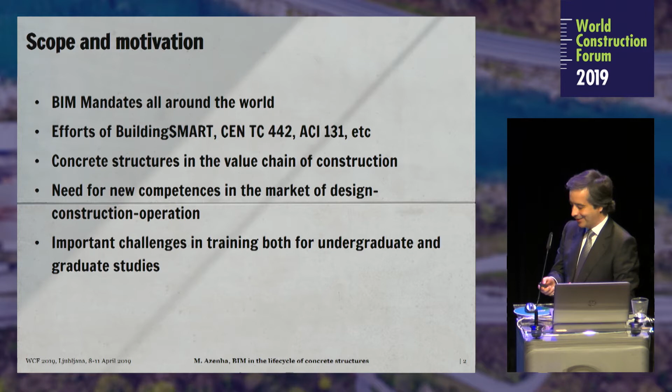So I am focusing here a little bit on things you can do with programming towards extending the capabilities of tools towards what we really need as engineers. And there I am drawing a lot of my inspiration from what I felt when I worked as a full-time structural engineer. So let me shut up and continue.

So I have the presentation divided in two parts. As the challenge was to discuss the life cycle, part number one is actually how to blend BIM into the life cycle. And I'm bringing here four hopefully inspiring examples, two of them at design stage, one mostly focused on the construction stage, and the other, which is the bridge, focused on the maintenance area.

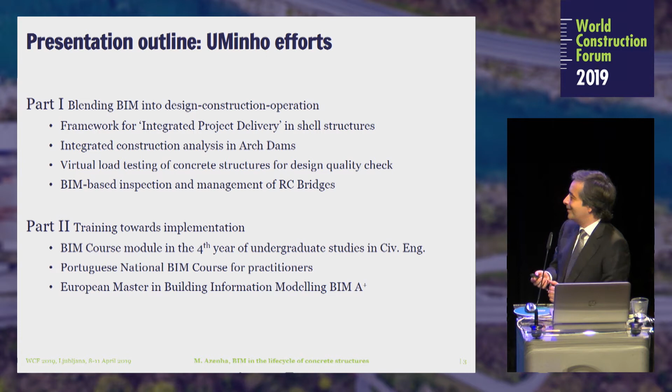Then in a second part, I think it's important to provide a testimonial of the initiatives we have been undertaking, despite the fact that BIM is not mandatory at all in our country, but we are managing to provide sort of an education to our students and to our practitioners towards making this more of a reality. And finally, the last ingredient, which is something we are very proud of, the European Master in BIM. So let's go in parts.

Part one. So I want to speak about these four aspects, starting with one related to the design of thin concrete shells. Thin concrete shells are known to be a terrain that architectural engineers or engineering architects really fancy, because you need to have the two capabilities to design such a thing. And they are normally limited to people that have a very great sensitivity on the structural and architectural side.

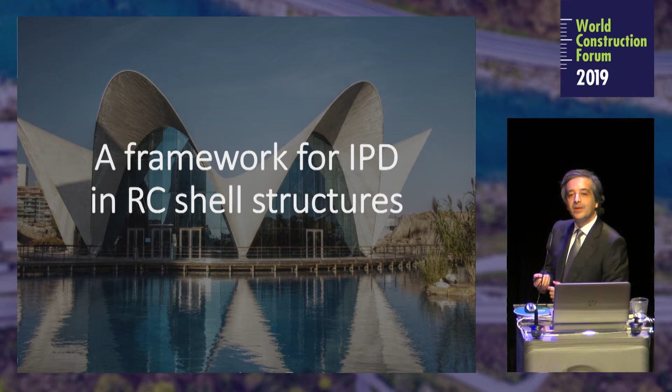And what we wanted to do with this thing that I show you here, a framework for integrated project delivery in RC shell structures, was to bring about the possibility of a real-time interaction between a civil engineer, for instance, and an architect working on the development of a thin shell. So what we created was a framework based on standard software.

I will try not to speak about the software itself, that's not the point, but using standard software that is feasible for this, we have this left-hand side screen, which is the environment where we are actually modeling the shell, the concrete shell, based on an architect's principle of the supports that should be given and the principles of what is the program that needs to be filled from an architectural point of view.

And then, based on such supports, we activate the dynamic relaxation methods. This is the hanging cloth principle, nothing new here at all. And then what we made was a framework that will allow the interaction directly under our total control of the parameters and the way of modeling that we see in a structural analysis software. And this allows us to have real-time information.

As soon as we pick up a shape according to the architect's intent, the structural engineer is providing instantaneous information, or even the architect can get it, under controlled modeling options. This is very important to give sensitivity to the structural engineer. So we provide information about stresses and deformations and hence the viability of the solution. This was made with these software attempts, and in the end, of course, we end up with a BIM software and a BIM platform, which will yield the final solution.

So with these quick fits, we change shape and quickly get the feasibility, and then we also add the possibility of bringing, for example, a stiffener, which will make it viable to have other things. As an additional taste, one thing that we did was to add multi-criteria optimization processes, again with the standard methods of genetic algorithms, but we include several aspects which I will not go into detail, but you see here cost, solar lighting, structural performance. We also add a little bit of sustainability, but only from the demonstration point of view.

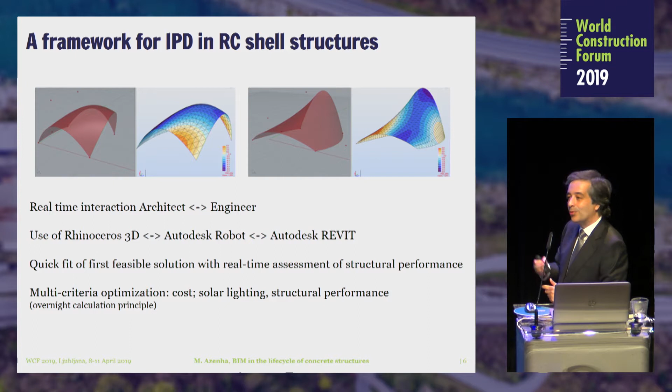We were not really deep in that, but then we followed what we consider a very important aspect, the overnight calculation principle. So after reaching a solution between architect and engineer, we let the computer work overnight on alternative or improved solutions so that we reach something more interesting. So we're speaking about BIM. There needs to be a process map, but I will not bore you with information about the process map. But basically, having an architecture and engineering discipline, we are putting the burden more on the side of engineering because we were playing such a role.

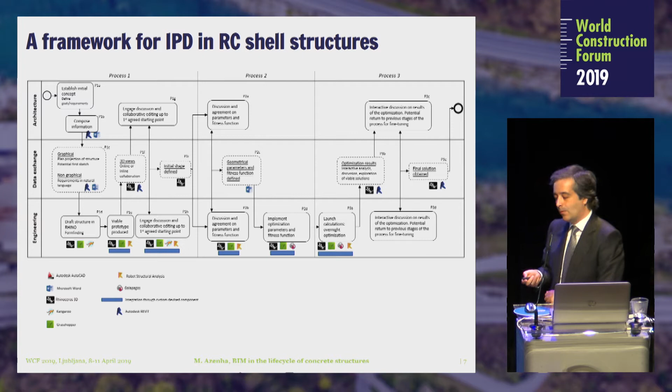Anyway, this takes 3 processes, as you see above, and the first 2 processes are the ones that pertain to the real-time interaction between architect and engineer, and finally we parameterize the structure and put it through an overnight calculation procedure. We found very interesting results, and for those taking pictures, this is published in Advanced Engineering Informatics, and the point is the overnight calculation will bring you alternative shapes. We don't defend that we should adopt them, but often they will provide us with interesting inspiration towards design alternatives.

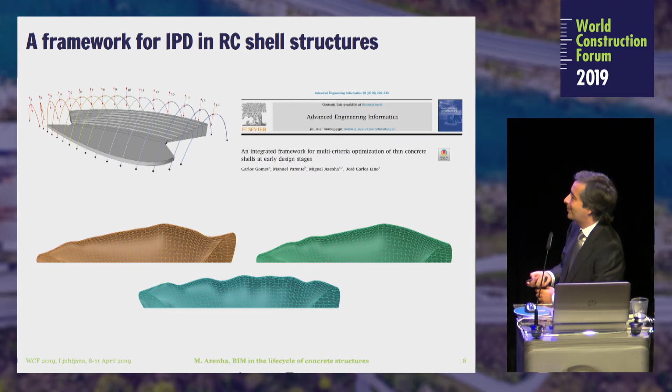So this is just an illustration here on the top left side of the parameterization we do of the structure, because it needs to be parameterized somehow. This is an amphitheater with the main lines of the amphitheater which will change height and length. And based on that, we can get the expectable situations for optimized structural behavior. So the cost of material decreases, and construction cost might increase. Anyway, going through several examples, this is my point today.

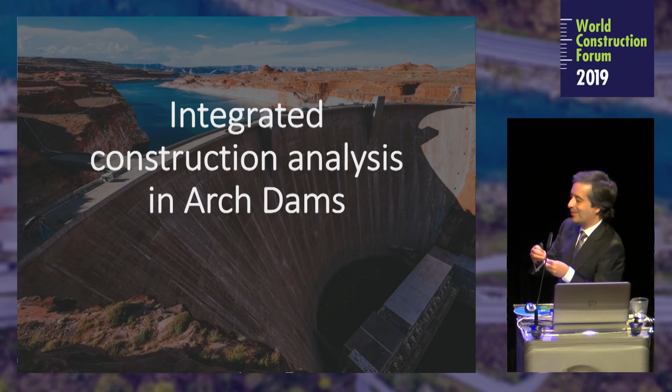I would speak now about integrated construction of arch dams. And this is a particularly interesting thing for me, just a personal note, because this is where I married my 2 fields of expertise, because I really work on the thermomechanical calculation of dams as a scientific field, and then I decided, let's see what happens if we join this with BIM. And what we tried to do was to figure out first the geometrical aspect, and I always announce this, I don't see any reason to say that some geometry of any concrete structure cannot be modeled in BIM, and we put that to the test with a relatively complicated arch dam with double curvature, even though the mathematics behind it are not necessarily very complicated.

The solid you end up with is very interesting, and this is just the layout of what we were doing. So first we actually do the modeling of the middle sheet of the dam, then we give it some thickness. It gets sort of a skirt on the left and right hand side, but then we intersect it with the terrain. We add the dam's galleries. We are actually doing constructive solid geometry approaches, and we are just using standard visual programming aided by code.

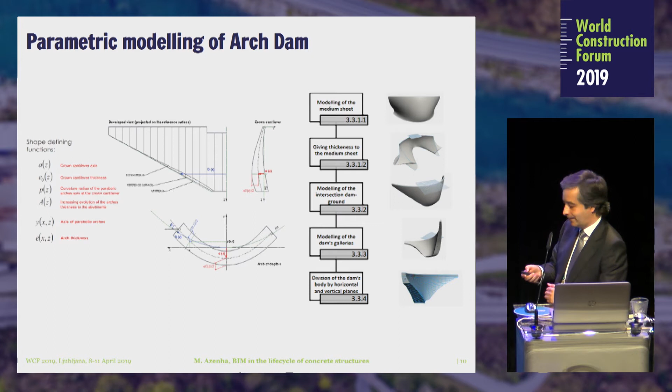And finally, we divide the dam in bodies. This is really important for those that are working on construction management of dams. And to put that all together, this is the illustration of the dam that we have. It's not a small dam at all. We have more than 50 meters dam.

It's a nice dam in the north of Portugal that has not yet been built. It's still under some discussion, but it's got some galleries that we explicitly model, including this water drainage vessel.

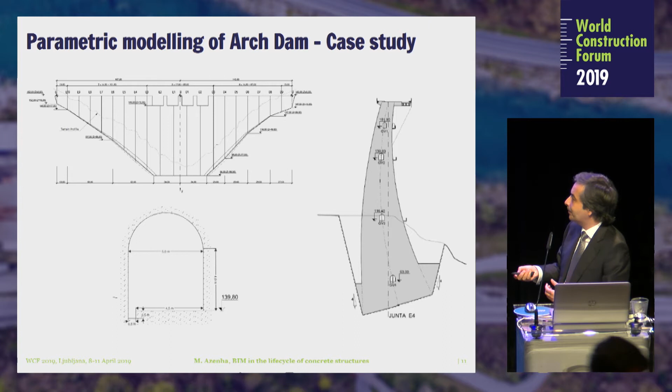And this is the result on the top part, the top left and top right. I draw your attention to this top right picture where you see the intricate intersection between the construction phases and the galleries. And the interesting thing is the degree of automatism to which we can create a new dam.

So there's an investment into the creation of the first model, but then it really works nicely to produce a new dam, even though I must be truthful, the code to run the dam takes roughly 30 minutes to run, so it's not snap.

Okay, but together with all this, the interesting part, in my opinion, is not the geometry. That's pretty obvious to me, but it's the fact that we try to blend in knowledge and to blend things that will assist us to take better decisions in quick and well-informed ways. So we came up with the coding of a two-dimensional thermal simulation software that will make you a cross-section of the dam.

And while we are studying alternatives of different thicknesses of the construction phases that will bring you a very different price on the construction, we are working on how they can be viable from the thermal cracking point of view. I guess you all know that if you are too ambitious on your thickness of the lifting heights, you will have more heat of hydration and then more risk of cracking.

So you have to invest a little bit of money in cooling the aggregates or cooling the water for the concrete, or using ice chips or nitrogen, whatever. There's a price to that, but in the end, if you are diminishing the time of construction, there you save a lot of money. So it can be worth it. So to study alternatives, instead of relying only on intuition, you can actually rely on the mathematics and the knowledge.

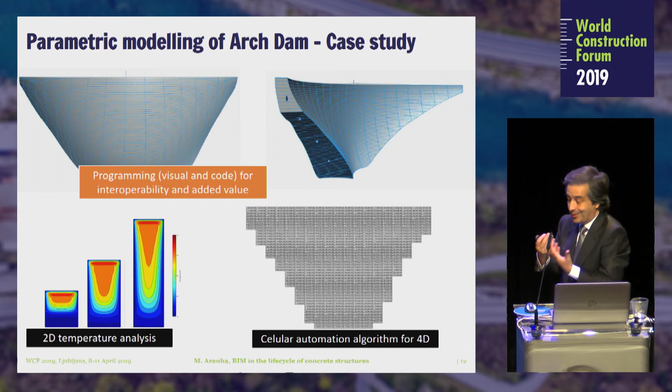So then combining all of this, we could manage the simulation of actual construction scenarios with cost in the middle of all that.

Another aspect, and this was spoken before, it was one of the last questions that was made to the previous speaker: what if we could virtually load test our structures? As a structural engineer, when I was making designs, I was very young at the time, and I often went home with a little bit of an itchy feeling in my head, which is, did I design this properly? Was the design actually passed properly to the drawings? And did I check all the drawings, in the sense that are they what I actually designed?

So I had all these issues, and then eventually when I'm in this life of research, I thought, why not use the richness of a BIM model? Because more and more it becomes, I will not use the word cheap, but cost effective to do a BIM model together with the actual reinforcement. And the idea behind this, and this was actually resulting also from a conversation with Tom a couple of years ago, so thank you for the inspiration.

With that, we figured out, let's export this to a nonlinear finite element analysis software. This is the NLFEA acronym. And with that, let's try to provide designers with the capability to export this to such a framework that will provide them with an estimate of the ultimate limit capacity of the structure just on gravity loads. Please don't ask me questions about the earthquake. The answer will be, we didn't do it, okay? Just vertical loads.

So what we wanted to assess was to what extent can we actually make this prediction, but at the same time, I have a lot of experience on nonlinear finite element analysis, and if you are working on cracked concrete, the constitutive laws are hard to put in the software, then it will suffer a lot of convergence problems. So we simplify the constitutive laws with some plastic behavior at the end, and particularly when concrete cracks, plastic behavior with almost zero stress. So there are a lot of features I could speak about, but there's no time.

But anyway, with those simplified methods, convergence problems don't happen, and it's sort of mimicking a plastic limit analysis that you would do on a hand calculation. But now we are using the three-dimensionality of the structure and taking into account the stress redistribution that happens. So of course, again, some programming happens there. We never get happy with the visual programming. We also always have to code a little bit more. Normally we use Python.

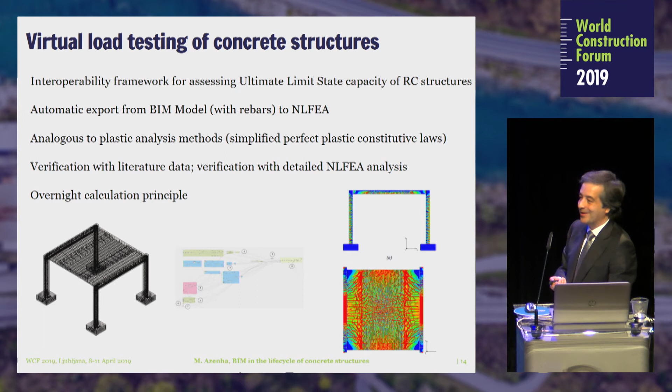Oh, by the way, the principle would be overnight calculation as well, because this is a very small structure, but if you get to the size of a building, that's a different game. We didn't go there, by the way. Please don't ask me questions about that. But it is feasible, pre-answering your question. So, I promised bridges. Here are bridges.

We looked a little bit at BIM inspection and management based on BIM for bridges, and we had a case study we worked on. This is a really small bridge compared to what was shown before, but the previous presenter showed the collapse of a bridge that happened in Portugal in 2001 by scouring of foundations, by the way. And this phenomenon caused our country to be very careful about bridge inspection. So we have very strict rules that are very strictly followed, and we created national platforms to do that, and we have inspectors that are regularly doing that.

So we partnered with Betar, which is the company that is very much advanced and authored the software that is widely used. And we worked on an example where we had to determine the load capacity for another client, DST, and they were asking us, what's the load capacity of this 1950s bridge? So we picked it up and we did an inspection as well. Of course, if you're doing BIM, if you don't put a laser scanner, you are not doing your job. So we put a laser scanner just to figure out also what we could get from there.

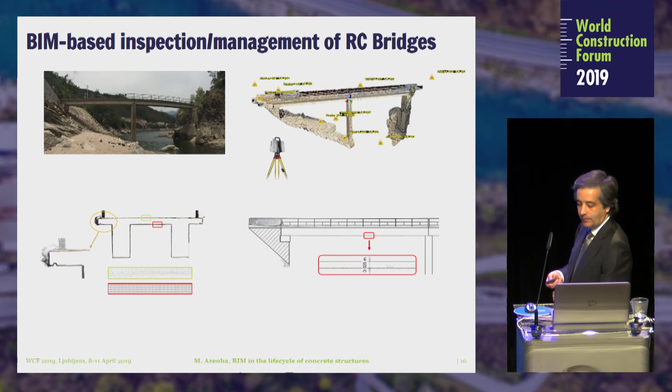And we were interested in geometry to begin with, but then we realized we had some interesting byproducts, which were the capacity to detect some structural warping on the two main beams of the cross-section. And also, you see here we could get with, I would say, a very decent accuracy, the deformation and the shape of the deformation of the bridge, which was not symmetrical. So this could give a little bit more information, and even with subsequent analysis, we can get the evolution of the deformations. Then this picture is just a provocation.

We were discussing how we can put this into a management system based on BIM. So the principle would be, if BIM has the capability to have all the data, let's figure out if we can do an IFC-based way of making legacy information for future generations that can be built up and built up. So we looked into several ways of doing this. We checked the literature, and the left-hand side would be the explicit representation of cores and the results of cores, the explicit representation of cracks. This takes a humongous lot of time, and this is not really, in our opinion, the way to go.

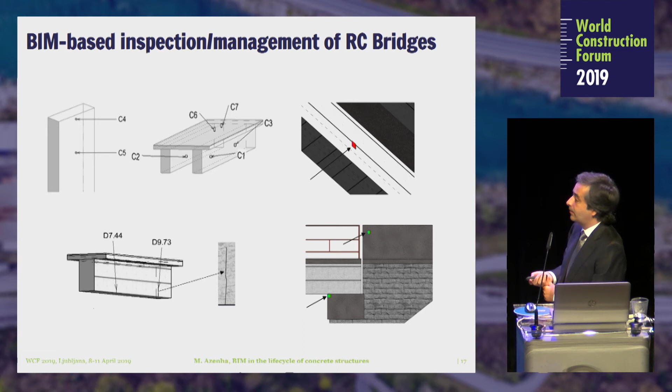So we decided to go to a patch-like alternative where we invest a lot in the information we put in each patch. So the green patches are biological colonization, and the red patch was a crack happening in an area of the bridge. Anyway, we focus a lot on the information, but I will not bother you with the details. We created a set of objects that we considered were important for us, like these balls that represent what we call the spherical panoramas. Together with the experienced bridge inspectors working with us, we consider that very important for subsequent reanalysis of stuff that we might not have figured out before.

We assembled the photogrammetric image of the surface, but we have a lot of issues with the shading and color in between consecutive inspections. But then I think the most important juice of our work was to figure out a way for inspectors that are not necessarily capable of using a BIM platform to put information into the BIM model. So we created a way through which, again, with some programming and with some API issues, we put an Excel spreadsheet where the objects were pre-identified.

So a first inspection needs to be made by someone that is clearly BIM enabled. So this first inspection for the model, the principal inspection, should be such. And then someone that is actually doing the inspection on site can populate it, sorry for the... oh, it's in English. So some Portuguese and some English. So then you could implement further information, and just by a keystroke, it will send information to the BIM model. But of course, in this case, you have to have the BIM software open as well.

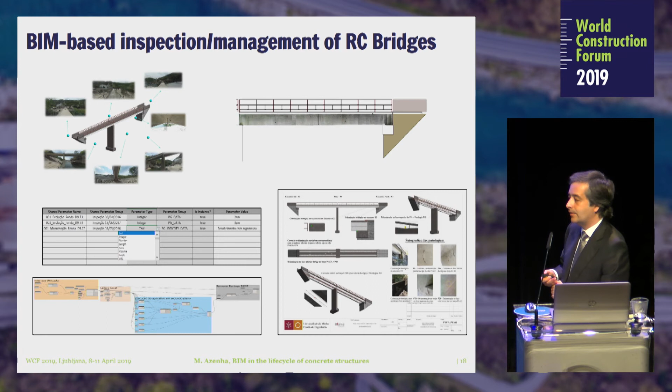And then, of course, the deliverables: we managed to get a similar degree of automatism in the creation of the deliverables that you get in a normal situation in BIM. So, 22 minutes, and I still have part 2, but part 2 is smaller.

So this is just to let the chairman know I know what I'm doing. And now, training towards implementation. I will describe 3 situations that we've been working on.

So the first of all is, I'm very proud, and the financial crisis was very interesting. It's important to mention this. The financial crisis assisted a lot. A lot of unemployment was happening back in 2011, 2012 in Portugal. And at the same time, I am working at a university, UMinho University, that from the point of view of importance, we are not in the main town, Lisbon, neither in the second town, Porto. So we are sort of fighting to get national recognition, in a good sense, in a healthy way.

But anyway, our department was more permeable to allow to have a BIM module in our course for 1 semester, because we were getting differentiated. So this is an interesting story to frame the thing. So I had a lot of negotiable power to say, hey, do we want to make a BIM unit, a BIM module? Let's do it. So I managed to do it despite trying to do it 2 years before. I just managed in 2013, 2014 in the second semester.

So actually 2014. 14 weeks of lecturing with 3 hours of theory in the morning, normally on Wednesdays, and 2 hours of practice in the afternoon. Normally this was an elective class, and we had 25 to 30 students per intake. This picture was not a standard class, by the way, because you may take me as a liar. Anyway, we had a practical assignment. So what we do is, these are 4th year undergraduate students. We provide them with drawings of actual constructions. This year they are making the campus, so they have access to the buildings that were actually built.

And one of the things that I found very interesting was that the students learn a lot about construction. They didn't have much experience in reading drawings. Now they have to put the drawings in a model, so this makes them learn a lot about construction. And I love to see their innocence when they speak to me and they say, hey, professor, this is not as it was built. Why? And I say, welcome to the world, because nobody does it. So maybe BIM will assist us in solving that, but it's really interesting, and they learn a lot about the principles of what they are doing.

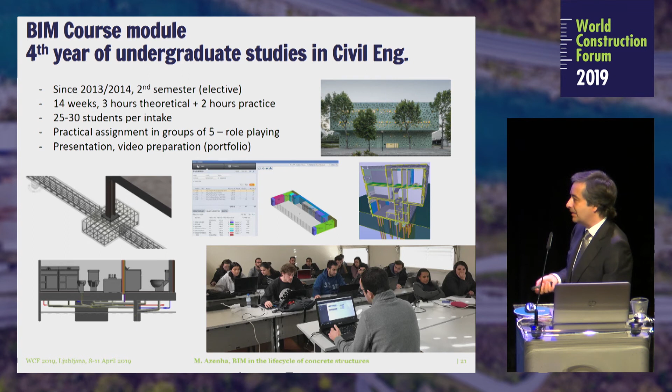And in the end, one thing that I also force them a lot, and nowadays communication is so much important, so I force them to create their own portfolio of their models, and recently they are including them in their curriculum vitae and making YouTube videos with that, and it's been working very nicely for the promotion of the university and of the students themselves, which is very nice.

Now I reached the time limit, but I will take just a couple of minutes if you allow me, Tomo and Vladimir. The Portuguese National BIM Course for practitioners. At the same year in Portugal, we were bold enough to go to the National Engineers Association and say, let's make a BIM course. And they said, okay, let's do it. We joined a set of friends together, actually, with the University of Minho, the University of Lisbon Engineering, and the University of Porto, both engineering, and I'm sorry, the logo of architecture is cut because of slide setup. I'm really sorry, it's not on purpose.

And we had the support of the Architects and Engineers Association, and we set up a course that actually is going now to the 9th edition. We are working on it since 2014, we made a total of 8 editions, more than 400 people, practitioners that passed through us so far. The interesting thing is they created a lot of network between each other. They were sort of alone, and then they met people that are actually with the same interests and looking towards BIM. Companies have been created, job mobility has happened, so this is really something that the market is willing to have. And we do the same.

We do a practical assignment, but in this case, they do some sort of role-playing according to their background. So architects will play architects, and engineers will play whatever they actually want to do. And they make a test subject of a building or whatever after the end of the 9 weeks of the course, which takes place on Fridays and Saturdays.

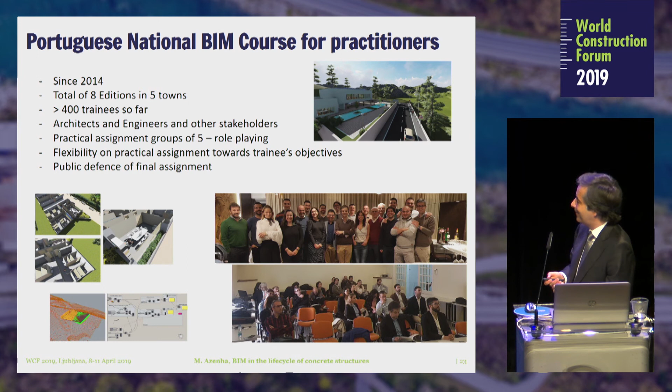And yeah, they dedicate themselves, and they make a public defense in the end. And okay, there are just here some illustrations of what's happening in the course, which is very interesting. And now the end of my presentation, the BIM A+,

Erasmus Mundus joint master degree that we have set up together with the University of Ljubljana and Politecnico di Milano. So we are the 3 awarding parties, so we are receiving students, and we were funded by the European Union for a 1-year-long master with 60 ECTS. We actually have 27 non-awarding parties, meaning the companies and other universities that are not actually receiving the students for the degree, but normally for the coursework.

And yeah, we had the first intake. We had, I can say, more than 600 applicants for the first year, because we have really nice scholarships to offer. The second call is open, by the way, in case you want to disseminate. Some scholarships exist. But the interesting thing about this master is what I felt, and as I told you before, I'm teaching BIM nationally, and I clearly know my shortcomings.

Even in the previous course that I showed, we are 17 teachers from different universities in Portugal. But in this course, what we found was 3 members of the consortium which are really, really complementary in their knowledge. So we divided our 6 modules of the coursework according to complementary knowledge, and we are delivering them with separate responsibilities. And this is us smiling very much in our first meeting after we knew we were funded.